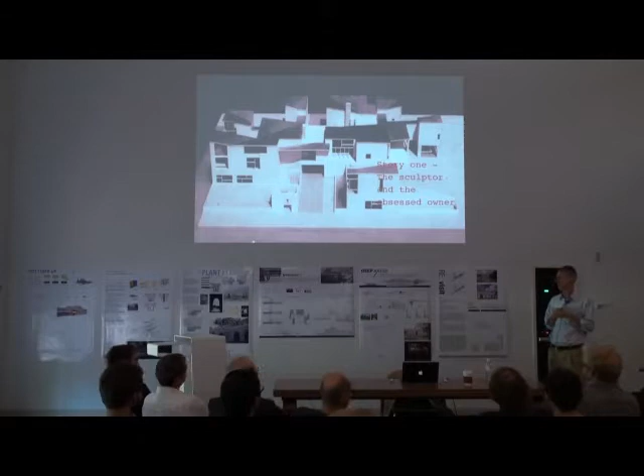Are you talking about this to these kids? Yeah, sorry, that was—sorry, there was a little fire that brought them in.

And so this project was going up right on that site. And the interesting story—again, this project would not have gotten built this way unless there was an obsessive desire to do this in a way that no one else would have ever done it.

It was a series, a sort of Steven Holl series. It was built as a sort of successor to the Stretto House, this idea of a series of pavilions and all these different panels. And Steven had this idea of each panel being an individual concrete panel.

Now down in Texas, that's fine in terms of environment and so on—you could build panels and insulate them in different ways, but it's not as critical as up in the Northeast. So we went through a bunch of different designs, and most of them were aiming toward building a conventional building and cladding it in some sort of precast. But neither the owner, nor us for that matter, nor Steven wanted to do that.

So at great expense, and going out on a big limb, the owner—who had just sold his company and had time on his hands—decided he was going to build this in a tilt-up fashion. Now, Steven had done this once before.

We weren't involved, but he did the chapel in Seattle, where you take this very simple manufacturing process—the idea becomes very efficient, and factories all over the South are built this way. You have your factory floor, you build this beautiful, gleaming concrete floor, and then you pour each wall right on that floor flat, and you just lift it up, pour the next one, lift that up, lift the other two up, and you have a building.

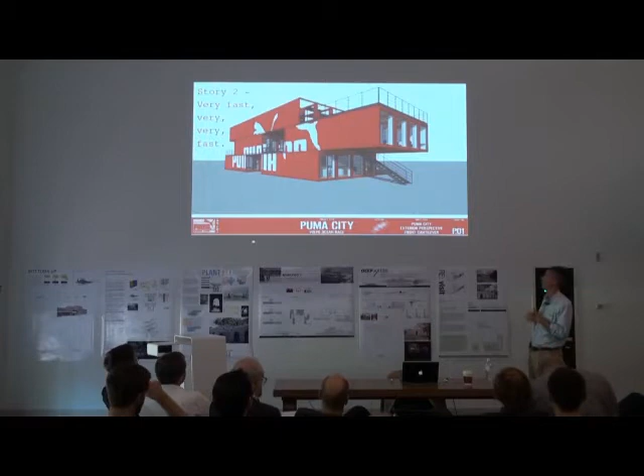So this was meant to be taken around the world. Puma City was built, and they didn't do it as much as they wanted to, partly because where they built it, everyone loved it so much and had so much success that they left it. But it was meant to follow the Volvo Race around the world, the sailboat race, and Puma was sponsoring a boat. So the idea was that at every port they came into, and I think there were 8, they would ship this across as shipping containers on tanker, put it down in the port, sell Puma equipment, put it back on the tanker and get it to the next port ahead of the sailboat.

They put it down in Alicante, Spain, and in Boston, right in front of the ICA, the Diller Scofidio design, and then a number of other places. They're now, I think, looking to put it permanently in Boston, and one in New York as a permanent structure.

So again, very, very easy structure until you start manipulating it. So we have general models that we design. The stresses are on the corner. The blue is the lowest stress possible, spread out, very efficient.

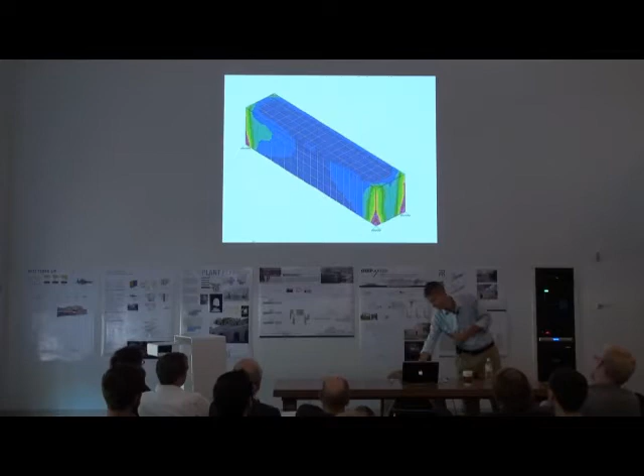If you then take this and design Puma City, we had to make these meshes of every single container. What doesn't show as well here, and I'm sorry for that, but you end up with openings and reinforcing around all the openings, so you get these stress concentrations where they weren't meant to be, and you reinforce that. Again, a little detour in the clear and easy story.

If you wanted the perfect story of a container, then you'd have no openings and you'd walk in one end and out the other and live within there, but there's a limit to an 8-foot by 8-foot by 40-foot space, I think, in terms of functionality.

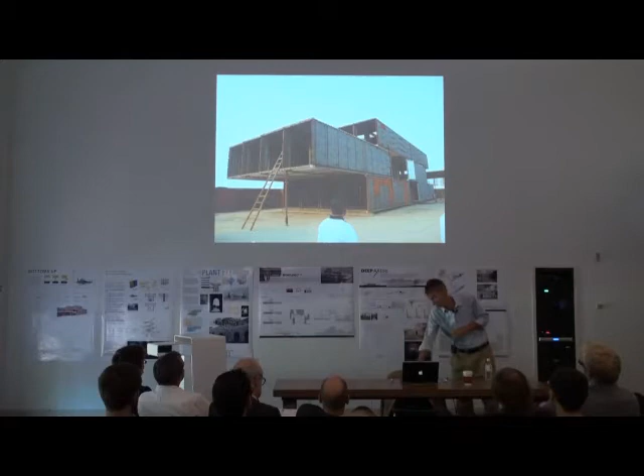This is it as the raw containers in the shop in China being put together. Again, very industrial, reused containers. LOT-EK's main idea is that you're reusing, that there's an environmental component to this.

Simple connections, the channels at the base. This is the top container, so that's a rail, but every container has a channel top and bottom that all just get bolted together, can be reused. Very often using shipping container fixtures. Those are the 2 engineers from the office who designed Puma City.

And Puma City fully open in Boston, filled with people on the cantilever. This was a fun project to do.

One of the interesting anecdotes, when we had designed with LOT-EK and never got built, a large metal reclamation plant in Elizabeth, New Jersey, right off of Route 1, and it was going to be a 4-story office building. And it was all connected by shipping container connectors at each corner. And we had to go in front of the building department in Newark and explain how this worked, and they were worried about the shipping container connectors, that they were strong enough.

When we pointed out that these containers are generally stacked about 8 stories tall and go on tankers through the worst seas in the world, and that any load they see, earthquake, wind, anything, pales in comparison to the load they see when they're out on the high seas, they sort of started to get the idea that this could be something possible. And they actually passed it and gave it a building permit based on that.

So I know I'm being taped, so I'll be very gentle.

This is a project out of one of Troy's offices. 2 Columbus Circle with Allied Works with Brad Cloepfil. I'm calling this a fairy tale, and Brad and I often discuss this.

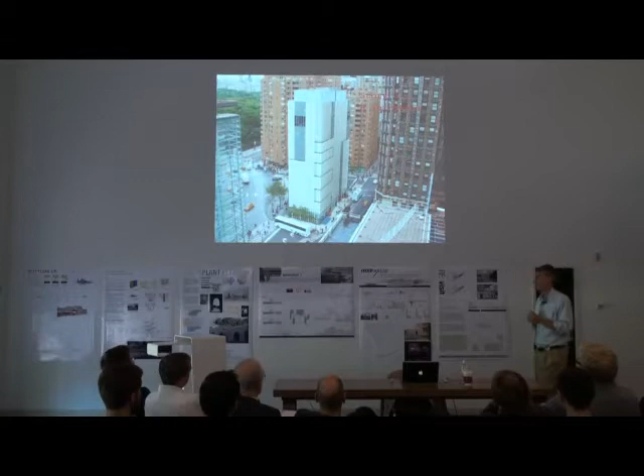So cutting this in the facade obviously had an impact on the structure of the exterior wall. Brad often, and he still goes on tour, tells the story that these are incredible cantilevers and that we did this phenomenal job cutting this snake through there so that each of these tongues sticks out and cantilevers over this major piece. The fact is that there's a 3-inch by 8-inch steel plate located basically at each edge of the cantilever going both directions, so that the wall is still doing something it wasn't intended to do, and it didn't have to be reinforced. We were able to justify it working as a beam instead of just a big wall.

But there is a support. It's not a cantilever. There's a pin support that's buried in a window mullion at every floor. That pin support at the base, these are pretty heavy. It's a very heavy building. At the base, it's taking about 1.2 million pounds of load.

The one story I'll tell you there - so if you hear Brad lecture on this about the phenomenal, he called me once and said, 'You got to send me that stress diagram that shows all the stress at the cantilevered end.' I said, 'I don't have a stress diagram that shows all the stress at the cantilevered end because there is no cantilevered end.' Then he commissioned an article about the building, and they called me up and said, 'You got to send those images of the cantilevered end so I could put it in the article.' I said, 'There is no cantilever.' So this has gone on for about 5 years.

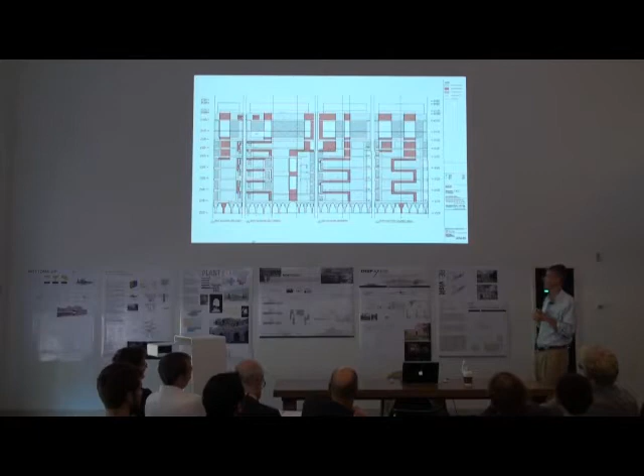One interesting thing about the pin, as a side note, is that Sealy did a beautiful job, as always, on the terracotta curtain wall that surrounds this. The curtain wall ran very close by the wall, and the wall was a built element, so it wasn't perfectly straight. One of our engineers came out to the site one day on the lower level, and the steel worker from Sealy was grinding the pin - the 3-inch by 8-inch pin that had 1.2 million pounds in it - because his mullion didn't fit. He was sitting there literally with a grinder trying to grind out about 3/4 of an inch of the pin. We stopped him and said, 'You probably want to grind the mullion and not the pin.' We got into about a half-day discussion of which was more important. We won out on that.

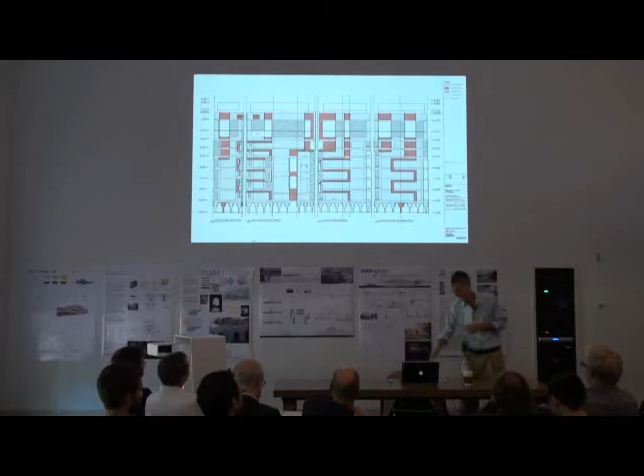So the next story is another job that Troy was involved in. And I swear it's very funny - I did not think of this as I was preparing these slides. But thank you, Troy, for inviting me down. This is your thanks. This is Milstein Hall - this is sort of just the combined monster here. The Milstein Hall at Cornell that OMA designed.

These heroic trusses in there - I'd like to say this was the idea from day one, and that OMA was certainly set on the idea of cantilevering from day one. But in all honesty, in schematic design, they were very, very set and happy with a row of columns on the other side of University Avenue. That's how the building was designed. It was all about a rigid grid inside with no trusses, a very straightforward design, and a nice row of columns right on University Avenue.

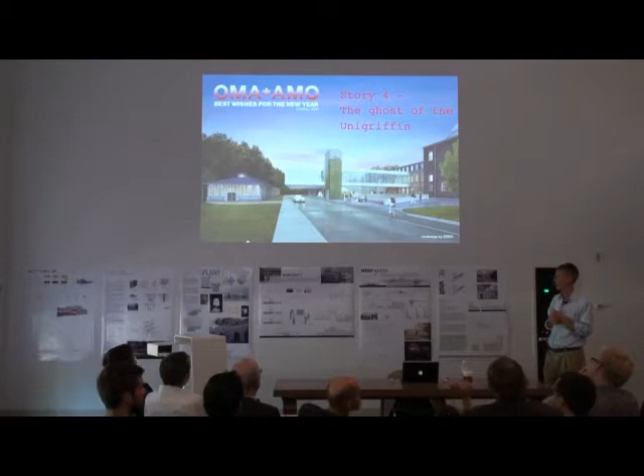Unbelievably, it was Cornell who said we don't want any columns on University Avenue. I don't remember if it was because they thought it was too much of a tunnel, or because it was too close to the foundry. The city's historic preservation board wouldn't approve it, because that building on the left is one of the most historic buildings on Cornell campus — the foundry, like an old New York foundry — and we'd have had columns too close to it.

So to avoid a lawsuit with the city, they said get rid of the columns. We had actually, as a firm, done the restoration of the foundry, so we had some expertise there. We said it wouldn't be a problem, but they didn't believe us.

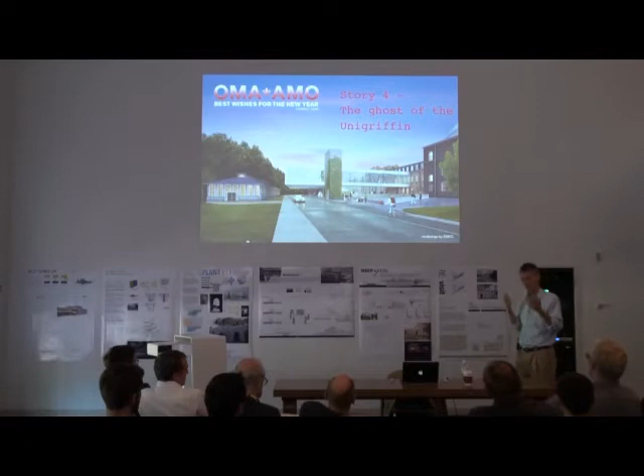So the school went to OMA, I guess right after or during schematic design, and said you're going to have to cantilever this 48 feet out over University Avenue, change the design, and you'll get extra money in the construction budget to do it. So we started to play with the idea of how you would do that.

It's a very thin, narrow floor-to-floor, relatively speaking, because it matches up with the floors in the existing building — Sibley, where the architecture school currently is. It's about 14 feet floor-to-floor, so we didn't have the opportunity to just grow this thing and have a nice deep truss. There was definitely... we were fighting two battles.

Cornell said, look, we know we caused this issue, or the city caused it, and we're going to put more money in the budget, but it's not an open checkbook. And OMA said, well, I don't want to just have a bunch of old bridge trusses there that look like any old project. So we spent about a month on it.

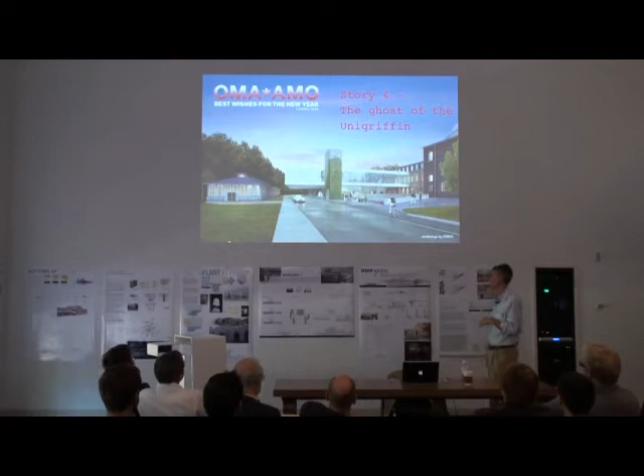It was a fun exercise. I think it came out and bore nice fruit. And what resulted — I'll give you a sense of how we got there — the story of this is that we decided to do this hybrid series of trusses.

We got into the study and the understanding, and we sent them probably about 30 different images: straight Vierendeel trusses, which is what OMA at first would have really loved — just no diagonals — and then a whole series of your very traditional, most efficient truss designs. We priced both, and said there's some middle ground that the university will buy and that OMA will like.

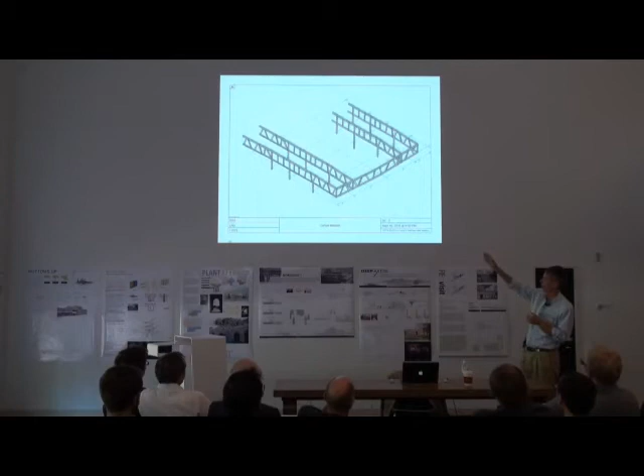The idea is that the heavier the loads, the more the stress in the truss over the cantilever to the right. There's also a cantilever to the left that zooms past Sibley on this part of the building — those are straight simple spans. Wherever the load was greatest, the stress was greatest, over the fulcrum of the cantilever, is where you get the most diagonals to take that extra load.

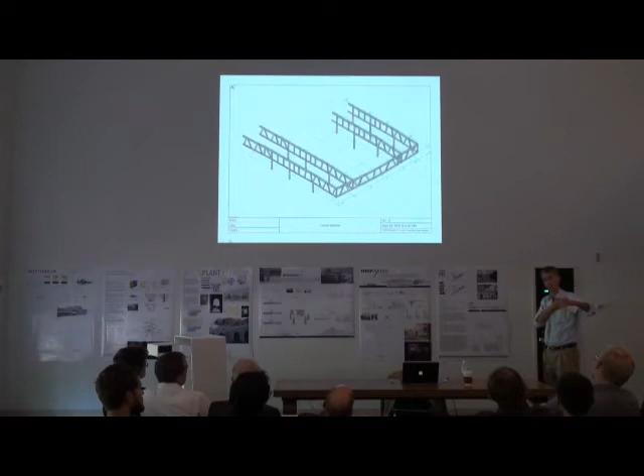Wherever the load is least, out towards the end of the cantilever and back in the simple spans, you have the Vierendeel trusses. So where you're asking it to do the least, you use the Vierendeels, which are less efficient but get the job done. Where you're asking it to do all the work, you're closest to a traditional Pratt truss or similar. There were probably 15 of these slides.

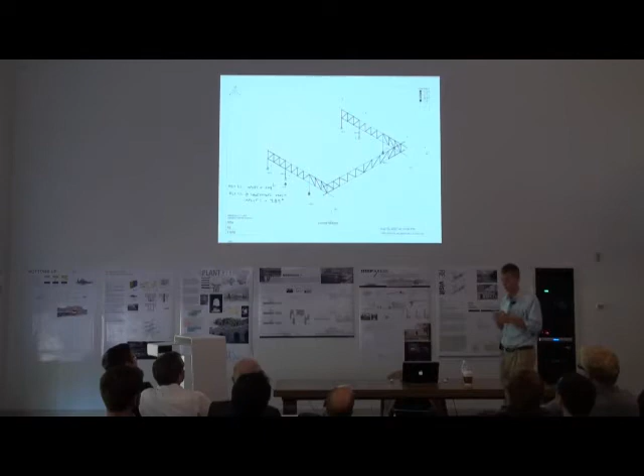This is just one to give you a sense — here's your traditional truss, which made OMA sick to their stomach to think this is what would go through the architecture school. This wasn't the final configuration, by the way — there are two internal trusses as well that come through, so you're occupying this truss space in the architecture school.

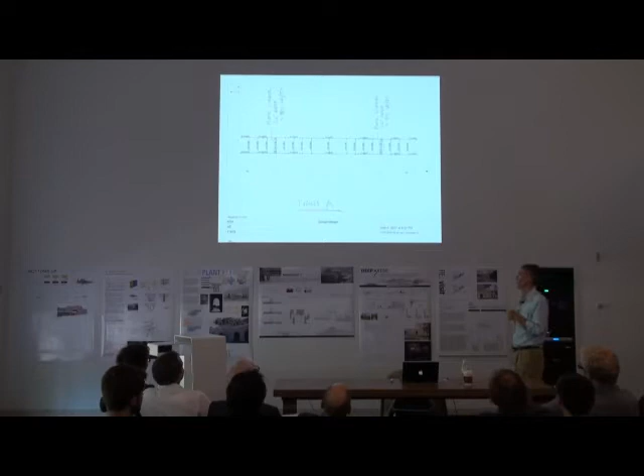We sent similar 3D images — this is just a 2D screenshot of the Vierendeel idea. You see these beam sizes — those of you who've taken structures, 14 by 605, that's a 605 pounds per linear foot column section, fairly sizable. And 27 by 368, again 368 pounds per foot. It's a lot of steel.

It was probably about a $7 to $8 million option. The traditional truss was probably a $2 to $3 million option.

I think they ended up spending about $4 million on the hybrid. It went up about 3 months ago. It's fairly successful, I'd say very successful. I'm always saying fairly because I don't want to take too much credit. Right now, it seems very successful.

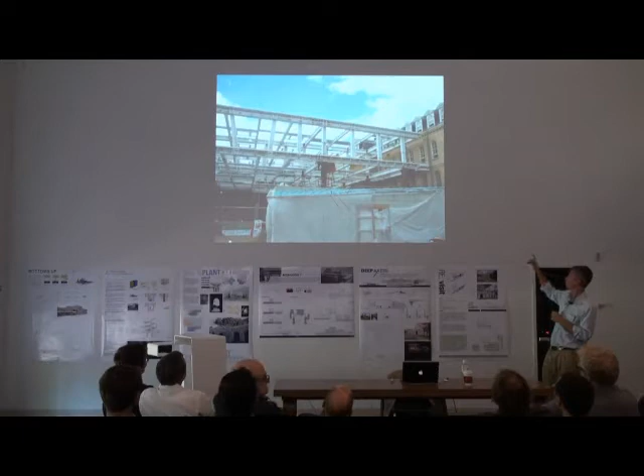This is out towards the foundry—sorry, no, that's Sibley, I'm on the other side. That's Sibley, so it's the more vertical Vierendeel trusses at the lowest stressed areas. The story here is about that journey between the two trusses and finding something that satisfied everyone's interest. And finally, the bad and pathetic haiku.

I didn't know I'd be videotaped, so apologies to my father.

So this is a project none of you have ever heard of, but it's probably my favorite project I've ever worked on. There's a firm, Coco, Adam—oh God, now I'm going to forget their names, I can't believe it. We did this house about 8 years ago.

It's a 2-person firm, husband and wife. They came to me through friends. They were doing a little house—I think this house cost $250,000. It's in the woods in Pennsylvania, for a couple who were just looking for a very simple country house.

I won't read my own haiku, you can read it, but basically they came with the idea that they wanted to do something modern, something fun, this idea of a Seagram's building. We've done a lot of this, but very often when you start worrying about thermal bridging and everything else in the Northeast, you compromise and end up with an applied mullion or something going on.

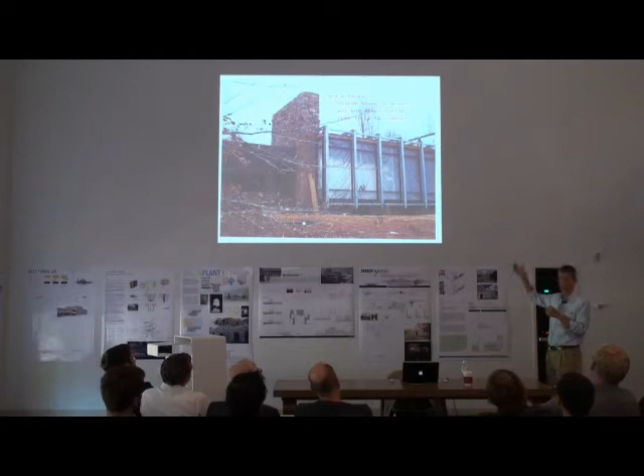Because this was a small enough job and they wanted the platform at the base to cantilever out, and they had no money, we came up with this idea that we would go to this shop in Brooklyn where we knew some people, and fabricate these rings that were the exact same size structural beam, top, bottom, and sides. So it was a very simple fabrication.

We fabricated, I think, 10 of them, and you'd basically erect this thing and hang the roof off the top, put the floor over the bottom because there was no basement—you're just sitting on 2 footings—and you could build this box within it, put up the curtain wall inside it, and this is all just exposed true structure. It worked out exceptionally well and is a great little house.

I literally think, I'm not trying to tell a tall tale here, that it came in about $250,000 to $300,000 for the entire project, and was a very simple conventional house other than these rings we brought over from Brooklyn and hung everything off of. So I don't know if that was the appropriate amount of time.

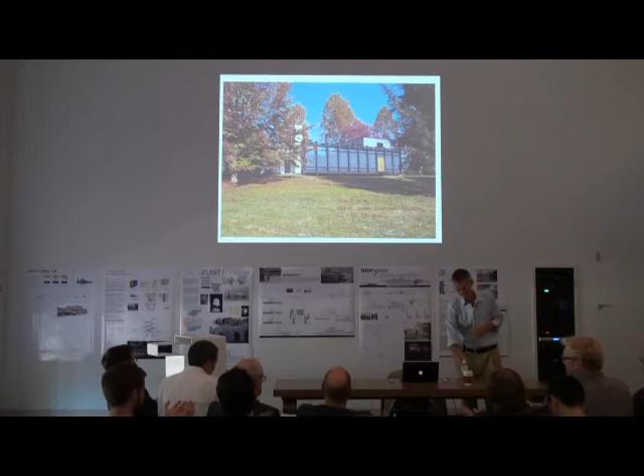I have a question about Milstein because I'm surprised—I find the solution ingenious, and I like how you walked us through it and all the projects. It was terrific. But one thing that surprises me is it becomes a sort of index of its structural load, which is very unusual for OMA to make that something that offers any form of indexicality or symbolism. Did that ever come up in conversation, or was it seen as something so abstract that the differentiation would override the reading of the structure?

No, the sense I got—and Troy can share in this too, since I wasn't there in the office after we left—was that there was very much an interest in reading this structural force, and in making a literal translation of what was happening, not abstracting it too much.

I think there were a couple of moments—not to take away from Nat's framing of the elegance of the solution—where it's really an awkward structural solution in the end, because the programmatic demand of having a simply supported Miesian box was that you have a very open floor plate, and people could walk around everywhere and configure the space however they wanted. Once you started putting in the trusses, if you look at the angles and where you need head clearance, there are very few places where people could actually walk through a cross-braced truss.

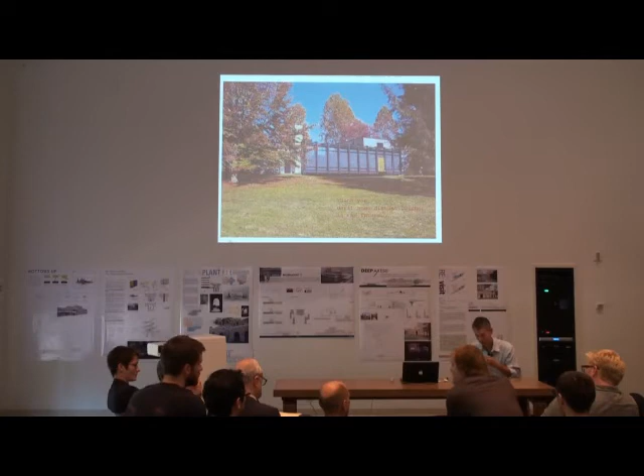So it kind of was like chasing your tail at some level. The more steel you put on the end, the more it's going to deflect, which means your curtain wall is not going to work. So there's a whole lightening exercise. But our office approached it from the point of view of how do we make this connectivity in the program that we're interested in making.

One of the interesting twists at the end too is that there's a stair tower on one side outside the building that sort of was a crutch almost. It almost hurt the project in some ways. Once we went to his cantilever, there was like this hard point.

This building wanted to be this very nice sort of, not many people think it was nice, but a nice simple droop at the end that's uniform. And instead you had this crutch over here that was also mitigating, that it twisted more than it just came over.

It seems like one of the things that would differentiate us from 50 or 75 years ago is that there might be three models of structure and the rest of the building relationship. Milstein has structure that varies a bit, the way that you're describing it, the way Troy's describing it now. This building, for example, has structure which is completely aligned with the skin, and in a sense is an echo of 50 or 75 years ago. You could also imagine a building in which structure is normal and everything else is doing something else inside.

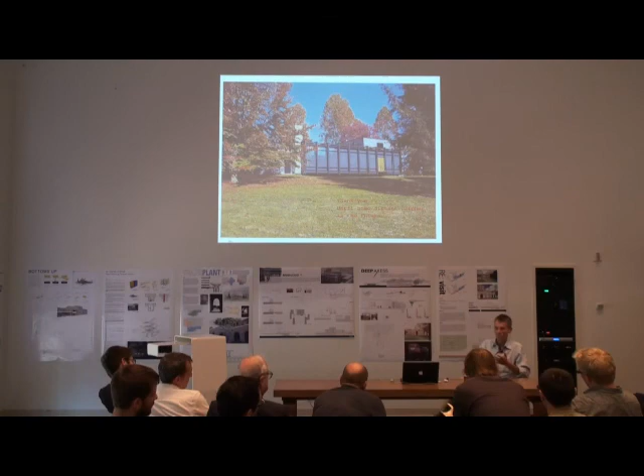So I was saying to him last week - I said this about 6 months ago too - where is the matrix that shows not just my steel, but shows a hedge fund quant guy figuring out that in Rahway, labor costs this, soil is this way, so each footing costs this, the solar panels have to be at this angle which changes the structure, the electricity is at this cost. Where's the local steel fabricator who's going to tell you, I got a bunch of tubes in my shop that are rusting, so I want to use tubes instead of wide flanges?

My optimization is almost minimal at this point. I can optimize where it's all the same, and even then, I've often said to architects, do you mean optimization in terms of the lightest structure, or optimization in terms of all the same sizes - so you just go out and buy one size and cut it all and put it together? So even within that, there's a lot of questions about what it truly means. I think at the baseline, structurally, optimization as a pure structural term is about load - how do you distribute the load so it comes down the same everywhere? But that might not be somebody else's optimization. I don't know.

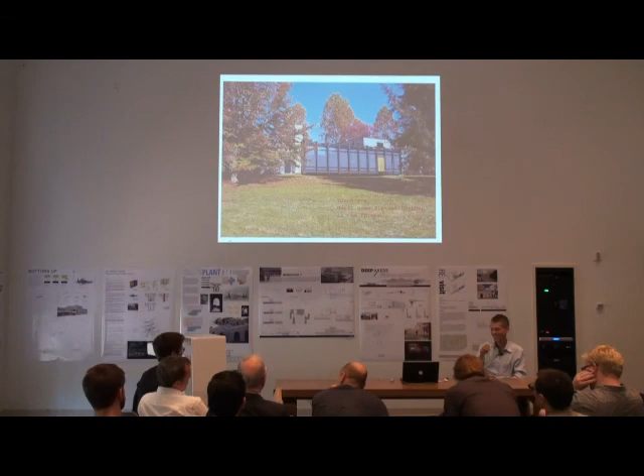Well, this is sort of a palate cleanser between your appetizer this morning with the students and your entree this afternoon, and we are actually going to feed you a box lunch in between. So to push the food analogy just into the ground, I want to thank you for bringing us a tasty start.